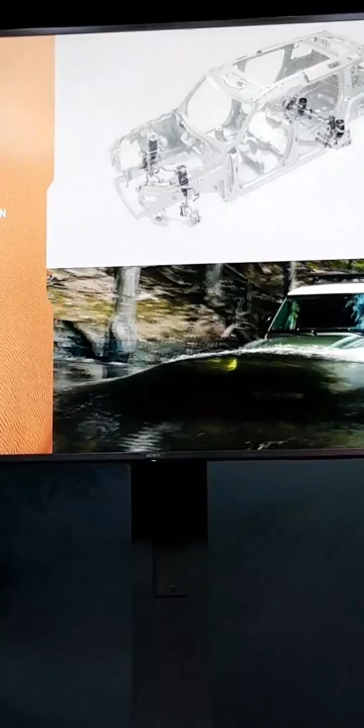Attached to this supremely strong body structure, we have tough steel subframes front and rear. Our suspension has coil and air derivatives, with a front dual wishbone and rear integral link design. The suspension arms, bushes and ball joints have all been tested at the extreme. We've actually rewritten all of our standards to increase the loads, to really make sure this is a fully validated, fully capable vehicle. Perhaps a good example of our extreme durability test is our curb strike.

This test uses a 200mm or 8-inch curb. You drive the vehicle fully laden at that curb at 40 km/h, and do it more than 5 times - it exceeds that test. This is the test that actually puts 7 tons of load into the body structure, so a peak load of 7 tons, a huge load.

The air suspension is also available on this vehicle - there'll be a coil derivative as well, but air suspension can lift the front 135mm and the rear 145mm, again giving you that ability to enhance off-road capability. In combination, that air suspension also helps us achieve 900mm of wading, as you've seen on the full-size Range Rover, Range Rover Sport and Discovery today. This car has that same capability.

We developed a range of tyres for Defender - all-season, all-terrain and professional off-road. Every single one is 815mm outside diameter and has a very large contact patch. You can drive up Big Red in Dubai without even having to change the tyre pressures.

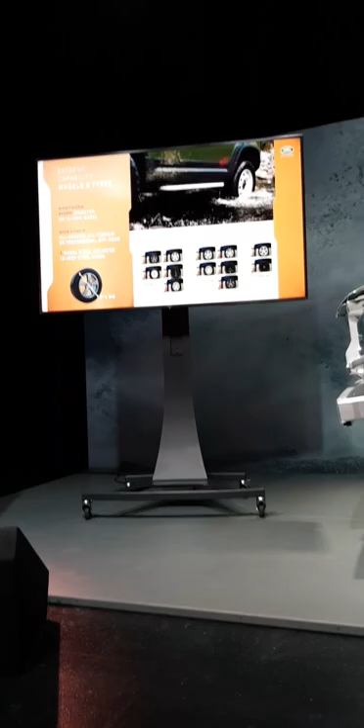So we've got extreme structure, we've got great suspension. Next piece, we need superior driveline hardware. The Defender is permanently all-wheel drive. It has a twin-speed transfer box, locking differentials, centre and rear. This vehicle, if you saw the reveal this morning, can not only drive down 45-degree slopes, it can drive up those 45-degree slopes as well.

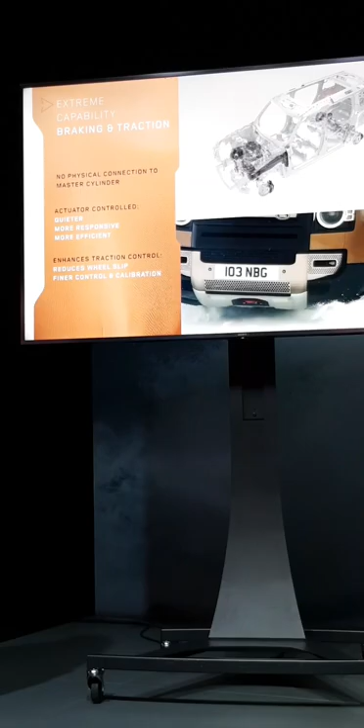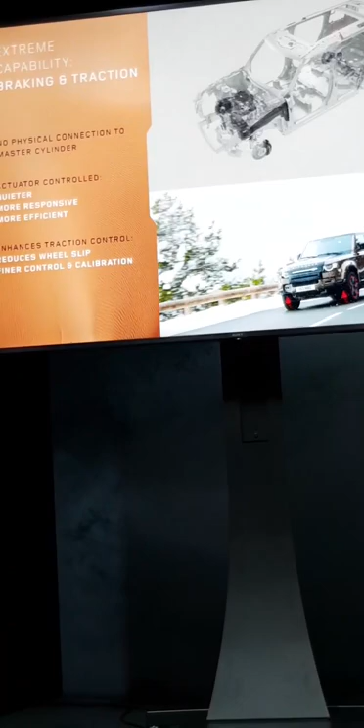For braking, we've applied the very latest brake-by-wire technology. The brake pedal actually no longer is connected to the master cylinder. The pedal now contacts an actuator that controls a piston drive within the hydraulic braking system, and it enables us to deliver a quieter, more responsive and more efficient braking system. It's precise, provides linear brake pressure to deliver superior dynamics and better control.

This control loop system can actually act faster than the blink of an eye - 150 milliseconds is the control loop time - and we use it to enable features such as advanced hill hold. So when you're driving up that 45-degree slope, if you take your foot off, the vehicle will not roll back. The hill hold actually holds it at that 45 degrees to enable you to concentrate on pulling away in the forwards direction and of course steering.

So as well as being supremely capable in any environment, it's efficient as well - for example, aerodynamic efficiency. The Defender has a flat floor. This cutout here is actually for the exhaust and also for the fuel tank. So it is a flat floor, brilliant for aerodynamics, brilliant for sand driving and ice driving as well.

We've combined that with a lot of effort with the exterior design team to put sophisticated aerodynamic detailing into the surface of the exterior of the car, and we managed to deliver a CD of 0.38. We've even positioned the spare wheel on the back exactly where we need it to benefit the weight and help with drag reduction.

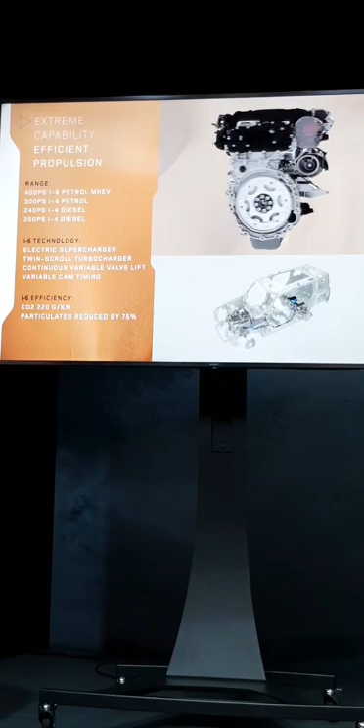So, supporting that efficiency, we have 4 engines - 2 petrols, 2 diesels, 4 and 6 cylinder. All of those engines are designed, engineered and manufactured by ourselves, by Jaguar Land Rover in the UK. We have the 6-cylinder Ingenium engine.

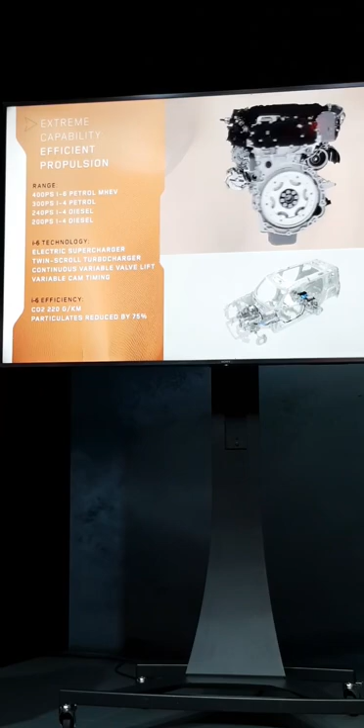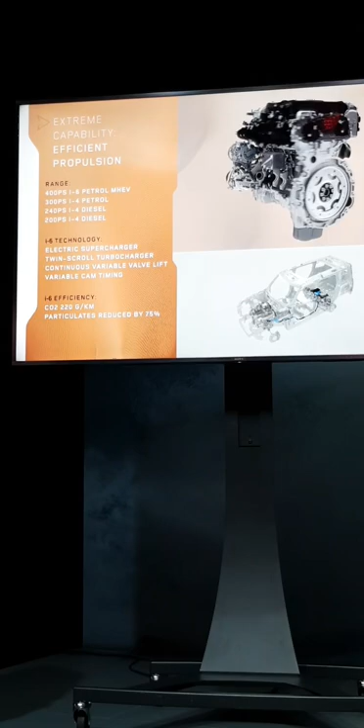It's new, it's electrified, it's got a 48 volt MHEV and produces 400 PS, 550 Newton meters of torque. It's got a great combination of technology - a 48 volt E-supercharger for enhanced response, twin scroll turbocharging for improved drivability, and continuous variable valve timing, valve lift, and variable cam timing for combustion efficiency.

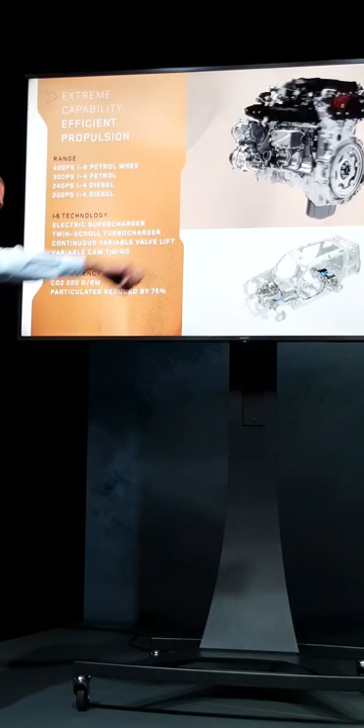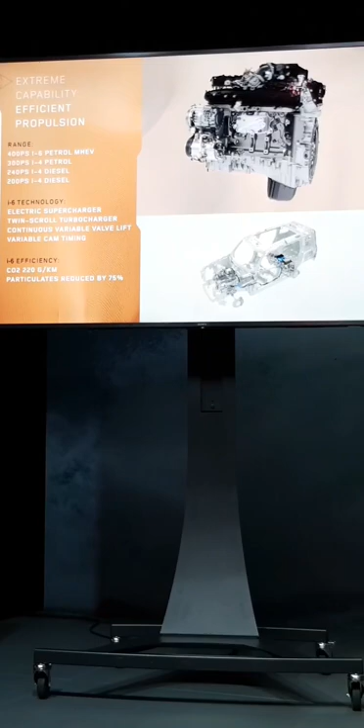The 48 volt system that you can see on this cutaway car recoups energy when coasting and adds torque infill during pull away, again to enhance performance and reduce engine load to improve efficiency. All of the MHEV components are packaged beneath the floor, so there is no compromise to the cabin space.

To test and validate the new Defender, we've gone further than ever before. We've done over 1.2 million kilometres of test miles. We've had a global test programme. We've already talked about Big Red in Dubai. We've been to Moab in Utah to go up the trails there. We've been to the Arctic Circle, and we've even been to the Nürburgring.

But of course, we don't just want to send cars around the world. We actually need to be able to do testing at Gaydon as well, and we've replicated all of these environments at our test facility in Gaydon, so we can now be in the middle of Warwickshire doing jungle driving, outback and autobahn testing, all within our single site, effectively all on our doorstep.

But it's not just about distance, it's also about severity of testing. And to do that, we have a combination of rig testing and of course the real world testing we've already talked about. We've taken Defender to extremes. It's conquered everything we have been able to throw at it. Everywhere we have tested it, it has excelled. It really has unsurpassed capability, the best on all terrains.

So, as you would expect, Defender is composed and confident on broken, rough and gravel surfaces. It's engaging, it's not tiring. You can actually drive it all day off-road, go to sleep, get out the following day and do exactly the same thing again. It just munches those miles in those off-road conditions and puts a smile on your face.

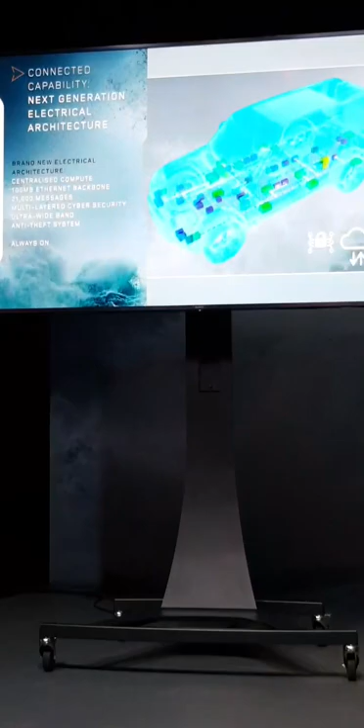So we started from scratch actually. This car brings to market our next generation electrical architecture, and we created this because we knew we needed to handle more data, we needed to handle it more frequently, and we needed to move that data around at higher speed.

So we've got three what we call domain controllers. We've centralised the computing on the car into three domain controllers, and they're connected by 100 megabyte per second Ethernet. That network can handle 21,000 messages at any one time.

Of course, it's connected to the cloud via 4G and Wi-Fi, and we have multi-layered cyber security to protect that information. In fact, the whole car is protected by our ultra-wideband key system.

You may hear other people talking about ultra-wideband whilst we show today. We came to the market with ultra-wideband two years ago with Range Rover, and it's a key that uses vectoring and position technology every 20 nanoseconds to determine the authority of the car to drive with the key in the person's hand.

So it simply prevents theft. And so far, it's been tested by some publications that you may be aware of, and so far it's undefeated. So ultra-wideband key is standard on Defender.

First of our domain controllers is PIVI, which is our next generation infotainment system. Now,

With the infotainment system, it has fast processors, QNX smartphone-like processors, it has a consumer device-like operating system, and it has a very simple menu structure and feel.